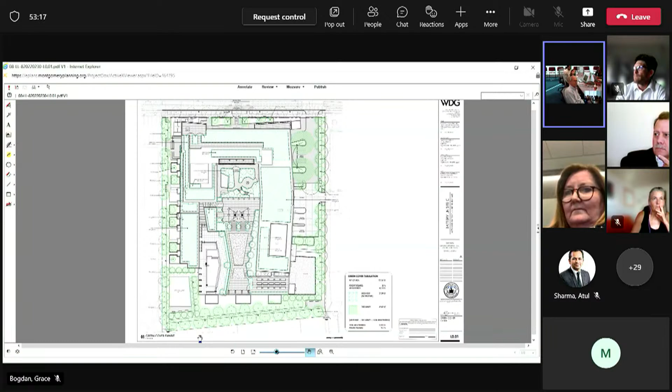If Bob, you could pull up our sketch plan, that might be a way for me to introduce this. What I want to explain is our rationale - how did we arrive at this design for these through-block connections on Site C? It really goes back to our sketch plan.

We took a comprehensive approach, 5 sites, as you well know. Our vision was to enhance this residential neighborhood through enhancing the connectivity, improving it. So what did we do? We first looked at what are the major unifying elements. It's the trolley trail through the urban park, and it's Battery Lane.

So we're going to improve the trolley trail next to our Site D and expand and improve it where the mid-block goes through to the park. And then we're going to add the cycle track from Battery, the entire length of Battery from Woodmont all the way over to Old Georgetown - a separated two-way cycle track. So what do we do?

And then we looked at what can we do to improve pedestrian connectivity. Of course, we're going to do all of the frontage improvements, just as reflected in our application for Site C and for the other sites as they are redeveloped. But we wanted to overlay that with internal pedestrian connections - that's what these two through-block connections are that we're going to talk about for Site C.

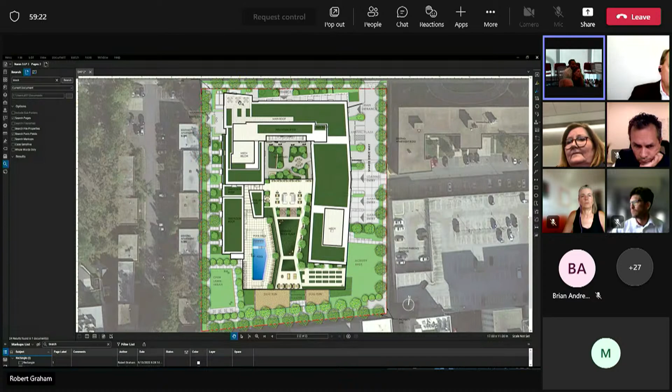Yes, it was a term we sort of ended up using, grand entry, but we were specifically looking at the western connection and how it comes off of Battery Lane. Our concern is we want to make sure that people walking on Battery Lane know that this isn't just for the walk-up entryways—this is a public space. So we were wondering if there was any way we could open this area, perhaps provide some seating walls that surround those electrical vaults, and make it more inviting to symbolize that area coming in.

We also want to know how this is going to transition. We were talking about the Bethesda Streetscape pavers, but material-wise, how is this going to help draw people in to make sure it's a continuum of public space? And then there's the discussion of how the furniture and lighting play into making that space more inviting.

So yeah, I said grand entry, but we can decide on a different term if that's the issue. That's what I was trying to figure out—what you meant by grand entry, because we were trying to be hierarchical here, but I understand if you're just trying to have it open and make people understand they can come in, that it's public. I think we can work towards that.

Just to add to that, some of the comments made previously were about looking at the design of the paving and the lighting in this area. I don't think our priority here is to turn this into a major bike connection so people can speed up and down this block on their bikes. But we do want to make sure there's an invitation to the public to use it, in a way that's much more passive and slow speed.

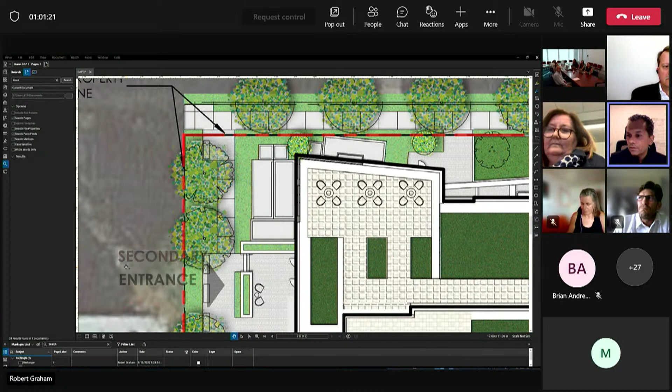If there is a cyclist that wants to use this to get to one of the other streets abutting the property, the design should be such that they are invited to use it, but when they're in it, they feel the urge to dismount and walk their cycles—because the paving is a certain type, the lighting is a certain type, and there is seating and other things happening along it that nudge you.

European examples are very good at that. I think they do a great job of delineating space, but also guiding the user of that space to behave appropriately in it. That's where our comments come from, and in fact some of the features being discussed to create this entrance are being shown in other parts of the site. For example, on the bottom right of this image, you can see where the sidewalks connect—there's a little paved space there, so it becomes more than just a pedestrian connection. We are looking for similar things along the other entrance as well.

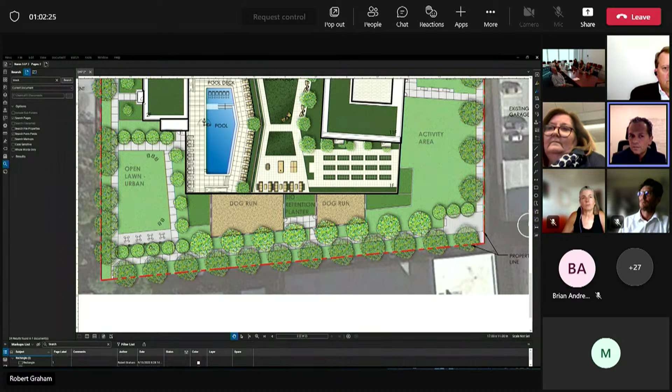And there are some opportunities there with the utility vaults and things like that that might help create some more permanent seating that screens some of that. And I think wayfinding and signage, as discussed previously, is going to be really important as well to make sure that it is used in a way that makes those intentions known.

It's a public space, but certainly not a high-speed bike connection. Yeah, we were trying to give priority, as Doug said, to pedestrians because one lot away in each direction, they have cycle tracks or cycle paths.

So, can I just follow up on two more points, Nancy? To the point that you made about the western connection and how it doesn't connect to Rugby, and how there's no opportunity or on the table right now for that site to redevelop - we understand that, but we also need to operate in the sense that at some point that site will redevelop, and how is that through-block connection going to get connected? So if your intention is not to bring it to the property line, we need to know at what point, when that site redevelops, how can that site come onto your property to finish this connection? So we need to figure out those details.

And I think that discussion was had similarly at 4901 Battery Lane, and I think there were some environmental resources that had chosen us not to bring the connections to the property line. That's not the issue here. So we just want to be able to work through that in that location.

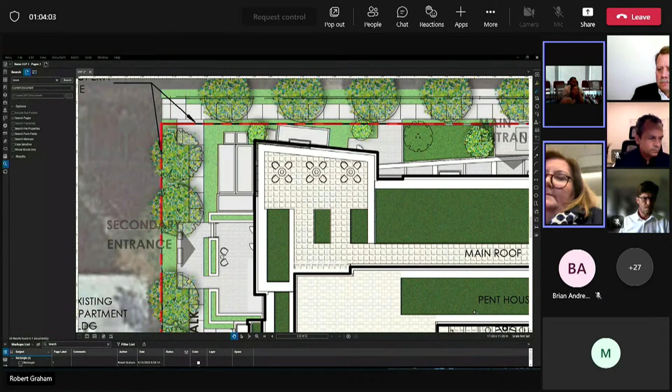And then in terms of the eastern through-block connection, I do recall, as you said, that Site B would eventually redevelop, and it would be a larger through-block connection at that point. I think when I was looking at the section in this area and then looked at Google Street View, it made me realize there is already a sidewalk on the adjacent property. So I was wondering how this is going to look in the interim, knowing that Site B is going to be your last site to come on board, and it might be closer to two decades before that even happens. So how is this space going to look in the interim, considering it's going to be a long interim? If there's any way, perhaps because you guys in this opportunistic way do own the adjacent site, could there be a way to combine the sidewalks at this point and make that space better?

Okay, we'll look at that. Thank you.

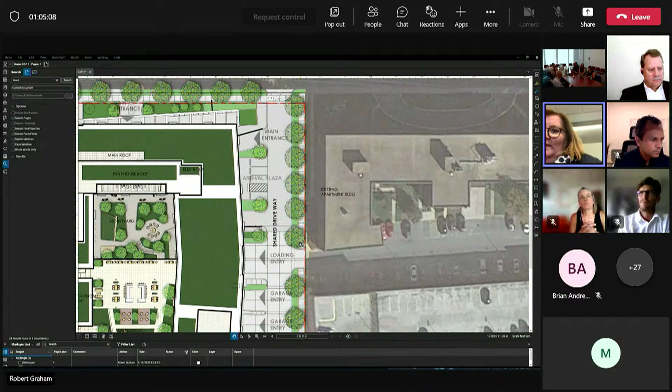Okay, and I know you commented on how 4901 resolved their future connections, which is there are nodes that give lots of flexibility for wherever the sidewalk needs to go in the future to connect to a future adjacent site. So just like Atul said, maybe there's a larger gathering space at the intersection of the western and the rear connection that gives lots of flexibility on where that sidewalk can come off in the future. So we'll look at that as well.

All right, I think we're out of time, correct? We have three minutes, I can talk. I think we have a lot of other meetings to schedule with you guys, so. Yeah.

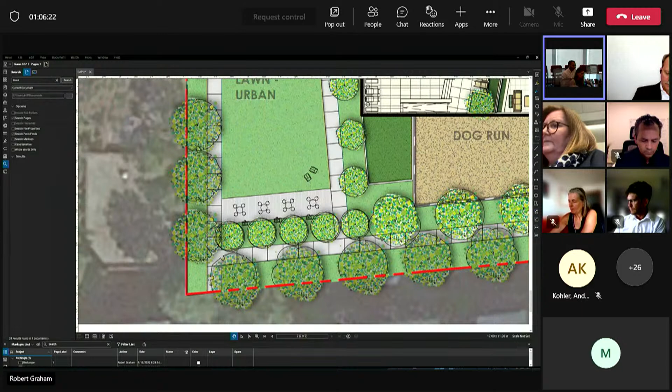So in terms of schedule, the 120-day date sort of slams right around Christmas time, and so that obviously isn't going to work. So we've backtracked it to a 12/15 planning board date, knowing that we have a lot of follow-up meetings. This is probably just going to be a timeline that we're just going to have to adjust as we move forward. But I'll go ahead and give you the back dates based on that. So your first resubmittal would be due September 28th. And I've adjusted the final to be October 17th, final submittal, with agency letters due on Halloween, 10/31, and a 12/5 posting. Okay.

Okay, and then one of the last dates in for a planning board. I'm sorry, what? So a planning board date potentially being December 15th. 15th, okay. All right, well, we'll talk internally and just see if that works, or what we need in order to respond to all these comments.

So thanks for all of your comments. We obviously didn't have a great deal of time to digest them or to drill down. So that's what the team will be working on from. So thank you so much. Thank you. All right, thank you. Thank you, bye-bye.

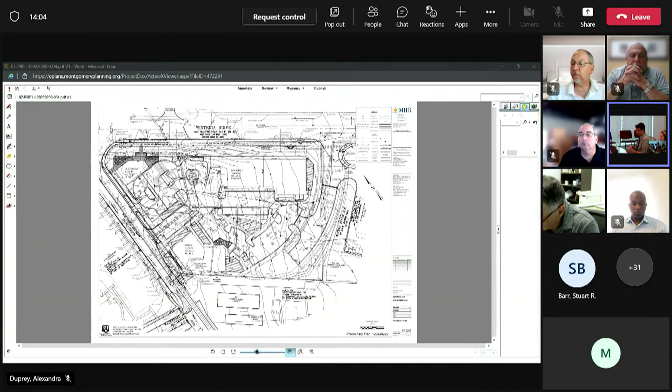As far as frontage improvements go, we've noted that the frontages don't seem to be being improved in accordance with the master plan, and that goes for Waters Road as well as Waters House Road. So I think that's about it. We'll go to the applicant now, it's your meeting.

Good morning everyone, it's Stuart Barr with Lerch, Early & Brewer. We're the zoning attorneys for this project, and we have our project team. Some representatives from Goodwill are also tuning in to hear the discussion this morning. Thank you all for the comments, appreciate it. I'm not going to introduce all of our team members, but we're all listening intently.

So I want to go through the big items you highlighted, Jonathan and Alex. First, some quick background: we signed a lease agreement with Goodwill almost 2 years ago to provide their building and access and parking to it. That's the most important component of this project. Over the last 2 years, we've been flipping this plan every which way to try to make it work. Originally Goodwill was up against Waters Road, then down closer to Waters House, and now up against Wisteria. Unless I'm missing something, I don't see any concerns with the current location of the Goodwill building, which is good because that's the most important thing.

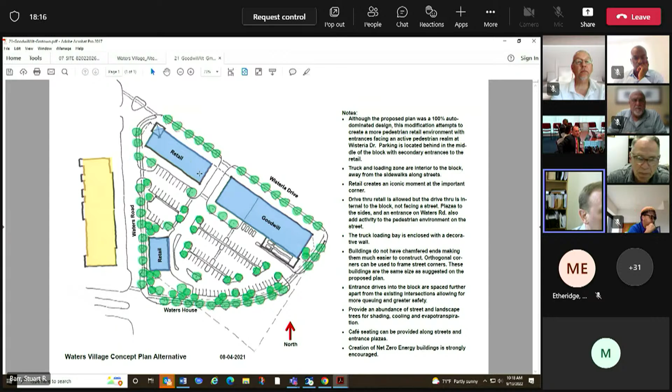We do note there appears to be a difference between showing the other building on Wisteria versus the concept you all were planning to show with the buildings closer to Waters. I think we can look at having the other retail building up against Waters as opposed to Wisteria—that seems to be the preference now—so we will investigate that. But we do want a drive-through on the site, and we'll look at relocating it.

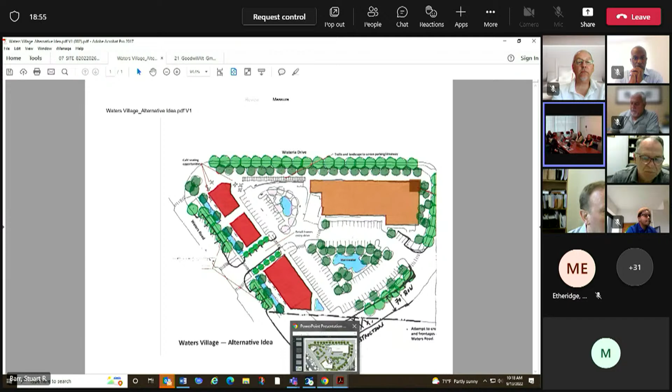Yeah, Stuart, look, we're not throwing buildings around or changing preferences, we're trying to work with what your program is. I think we're getting closer, and we were just trying to respond to your most recent evolution. So from our standpoint, we still felt Waters would have been the preference, but we're trying to work with you and your programming on site. Okay, yeah, appreciate that.

So the ball's in our court to look at flipping those. As far as some of the other things, obviously a lot of things are impacted—circulation, parking, and so forth—so we'll just have to see how that unfolds.

I guess the comment about us not providing the correct frontage improvements per the master plan—I guess we'll have to talk with our group, because we thought we proposed that correctly, but we'll investigate that.

I'd like to talk about the Waters Wisteria intersection, because I think we're not in sync on what the comments are, or the basis for the comments. So here's the current intersection—hopefully everyone can still see this—with Waters and Wisteria kind of intersecting at somewhat of an angle.

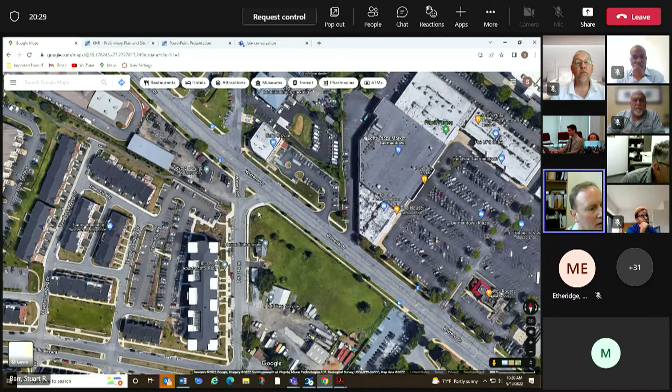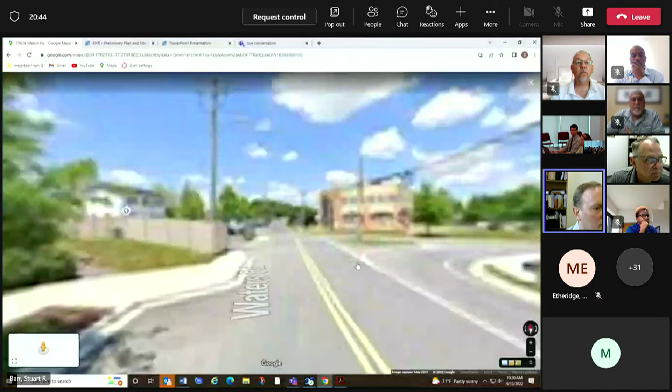The right turn that allows you to take that right from Waters onto Wisteria—our client provided the right of way for that turn movement within the past several years, and that improvement was made. So as you're traveling northbound on Waters, you have a stop sign at both turn movements, and the way the alignment works now, you can go right across Wisteria to travel to Waters Road on the other side. Conversely, if you're coming from the other direction on Waters, coming from this side of Wisteria, you can easily get across Wisteria given the alignment as it currently exists.

So we think it works. If we need to restripe this to make it more clear for pedestrians, we can certainly update those crosswalks. But I'm just not understanding the comment about—let me pull it up—eliminating the right turn lane and the island. So if we need to have a follow-up meeting with DOT about that, we can.

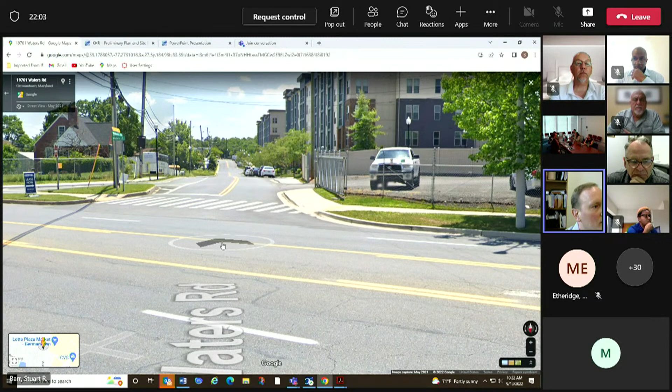Want to talk about the terminus of Waters House. We can certainly look at a hammerhead arrangement here.

This is just my personal thought on it—I was hoping we could have some kind of gate or bollards located so that no one needed to go down and make a turn around. But we can certainly look at a hammerhead configuration if that's the strong preference. I just think it makes more sense to have a temporary gate or bollards, but we can talk about that further.

I do want to reiterate how important it is for us to get the Goodwill building approved in December at our hearing date. Under the timeframes, we have an agreement in place—we've spent the last couple of years modifying the plan and really need to move that forward to meet the deadlines. So if that means we need to phase things, so be it. But we really have to get this Goodwill building approved and underway as quickly as possible.

I'm going to flip through some of the other comments. Brian, did you want to ask anything specific? Brian Donnelly from Macris, Hendricks is our civil engineer.

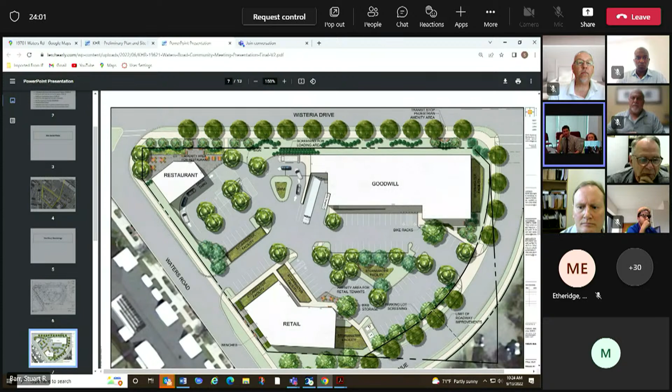That cross section was only approved that way because they were working with limited frontage, limited dedication at the time. Since you're going to be dedicating with this application, that provides the full right-of-way width to improve it to meet what was envisioned by the master plan.

But I guess because of the right turn lane, we really can't fit any parallel spaces in to make parking on both sides, unless you're okay with eliminating that right turn lane. Well, and I think we made that comment as well. Eliminating that right turn lane would fit with the cross section. It would also allow for adding the on-street parking, maybe not all the way along the entire frontage, but at least in some locations.

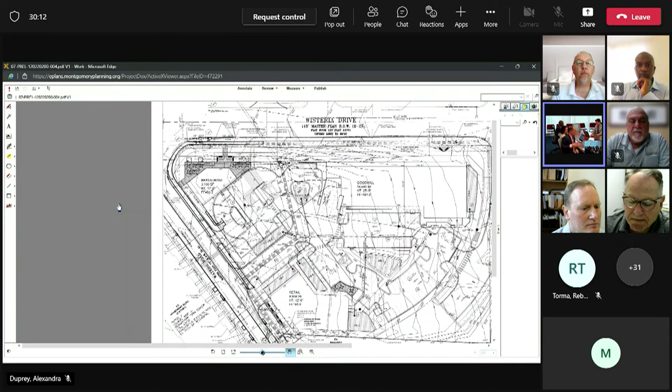Yeah, now look, I mean, we kind of jumped right into issues, but taking a step back with the residential community to the west of here, the train station and the formal connection of Waters Road to that station, seeing what you're trying to do on this site, grand aspirations someday across Wisteria Drive, that shopping center gets redeveloped as well. We're really seeing some of the framework of a town center come together, a main street, et cetera, and really want to put this project in the best position to succeed here moving forward, that we get all these pieces in place. We're not looking at this in isolation, so we really are trying to make sure that we get it right with this very important step. So appreciate that you're here moving forward and trying to figure these things out together.

Well, when do we expect comments on the traffic study? This is Billy Whalen, we're still reviewing the TIS. I'm sorry, was the question, when are we getting comments? I didn't, yeah, I mean, the comments were due this last week. So we just need to know how that is going to impact our infrastructure.

This is Rebecca Torma from DOT. Did we approve a scope form? Did DOT and planning hand you a signed scoping form? Scoping, do we approve scoping? I don't think so. Chris, are you on? We scoped this with Chris Van Alstyne, and then DOT had some comments, and as SHA did as well. Okay.

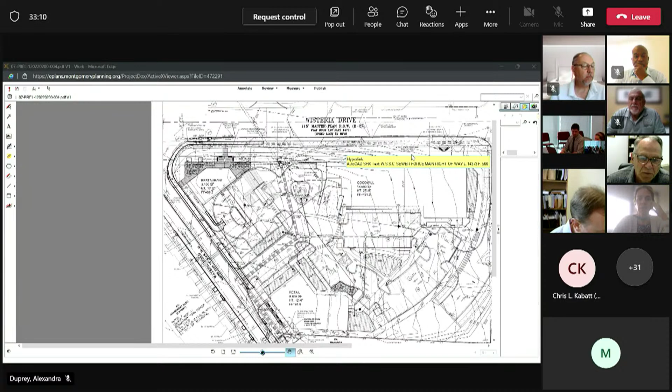Yeah, we'll do that, Rebecca. Okay, well, part of the reason why I ask and I'm a little anxious to get those comments is that we're on a pretty strict schedule with trying to deliver some of these buildings. So that's really why we need to get this thing as complete as we can. Right, but you shouldn't proceed without a signed scoping form.

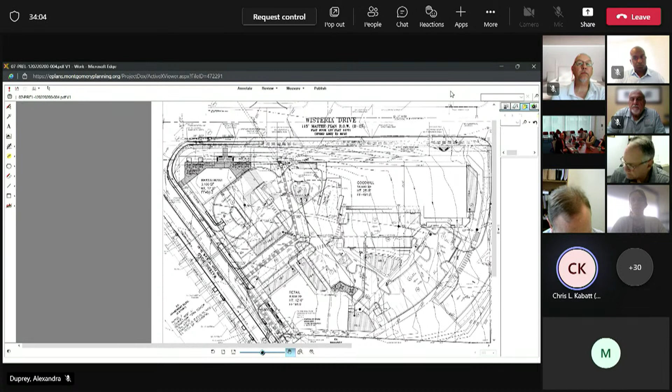Understood, so who has the scoping form at the moment? Is it us, or is it DOT, or the applicant? I believe we got dropped, it got dropped, and then I know there was comments sent. So I'll take a look through my emails and see what I can find, and we'll coordinate with Brett Brown. We'll do the same, because I think the last thing was confirming the study intersections, and that's what I was saying about the correspondence, Rebecca. So we'll get together and share those with you if they're not in the appendix. And then we'll just come to the agreement. Yeah, like I said, I just can't remember exactly what we did or what we said.

And Chris and Rebecca, if there's anything you need from us while Chris Van Alstyne is out, please don't hesitate to reach out either to myself or Brett. We'll try to fill in as much as possible, and we definitely want to keep things moving on our end. Okay, thank you. Yep, sure.

Well, you guys had some issues with the drive-through in its current location. Do you have any issues with the drive-through on the site in the back portion of the property? Or is it strictly the drive-through that you're opposed to?

Are you referring to locating the drive-through in that area? Because the sketch you provided didn't show any drive-through, and I just want to make sure. In general, we prefer not to have the drive-through, but if we're going to pull the deal-breaker card, then yes, that would be the location it would have to be.

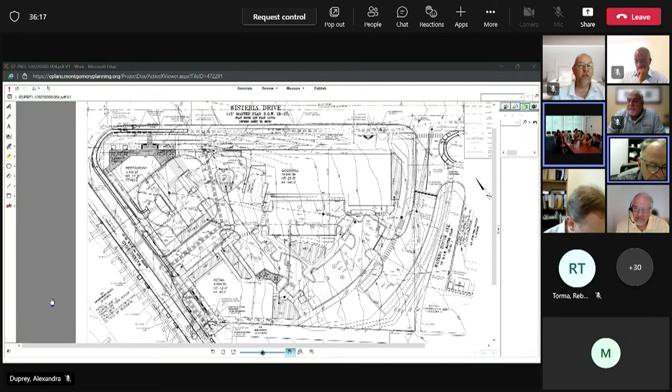I don't know if our urban designer is on the call, but I'll jump in here and then turn it over if he's here. We have serious concerns with the location you're proposing for the drive-through. That's the least ideal place, not just because of visibility, but also pedestrian and vehicular conflicts within the site and the current layout of the Goodwill store.

So if you were to keep a drive-through on this proposal, it needs to move. We think the lower corner is probably the best location, out of the way, and will still enable safe, adequate, and efficient vehicular circulation and pedestrian and bicycle flow through the site. So that's our thought.

I also want to add that our concept and thinking was revised from the version you saw a couple months ago with the concept plan application. There are several things here we want to highlight with building orientation towards Waters Road rather than Wisteria.

I see that Roberto and Paul are on the call. I'm going to turn it over to them to elaborate a little bit more on the design comments, and I'm still here and available for questions if you have any.

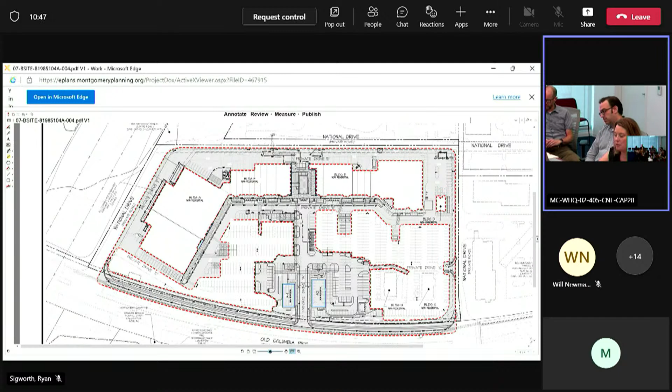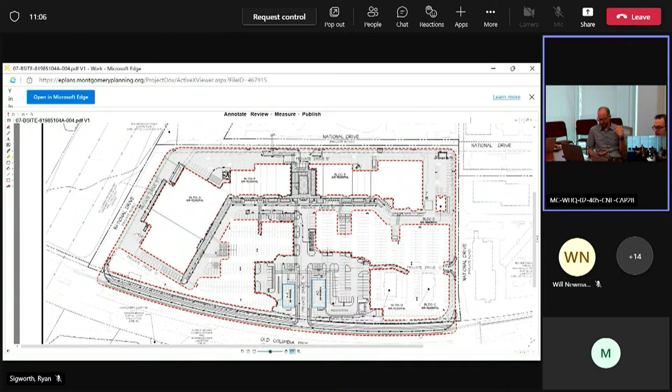Thanks, Christina. I don't think there's a lot of huge issues. There's some questions and concerns from the design team and the master plan team about the rear face of the existing buildings, since we kind of expect the property in the back to redevelop and what that's going to look like.

I know that's maybe not technically part of this site plan, but it's still a concern. Had a couple of different pathways and some questions. I think the biggest issue is just how that centralized open space, where you're going to knock out part of the building, is going to be designed. And I think DOT has some requests as well.

But that's about it. There's not a lot, really. You looked at the comments, there wasn't a great deal. And you read them pretty much in order of what we had, because we had a meeting yesterday and identified what we'd talk about.

And I had a question, what you were doing with that covered breezeway between building D and the main building?

Because there's a covered bank drive-through or something there now, are you taking that out? I saw there's outdoor seating there, but are you going to take that out, or what? No, maybe we need to clarify. The intent was to keep that covered area for now. Yeah, I was going to say, I think you're going to make it outdoor seating. You should just keep that and reface it and make it look better. So in the file, we just need to create the red line, show it as dashed lines or something, and call it out to remain.

Yeah, it was just tough to tell what your plan was there.

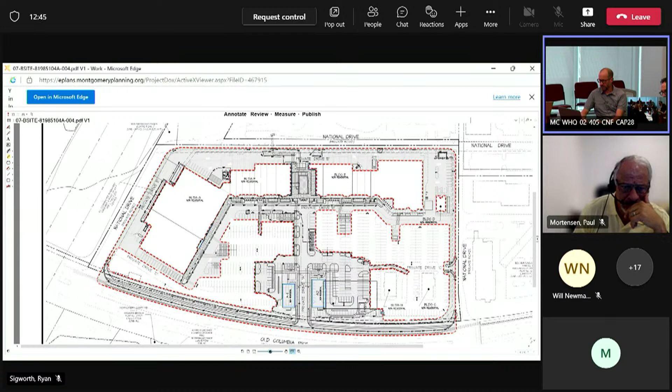Then I had this part of the site, it's very confusing. I think I drew it in E-plans. What I'd suggest is you have this pedestrian route that just kind of ends right here, maybe it's just an oversight in the drawing. Yeah, there's no way to get in, and you'd go right past the dumpsters. Well, actually, that's what that's intended for. That's sort of a back service alley, it's only 3 foot wide. It's just so that if they come out of the back, we have a screen wall at the back door and some of the utilities.

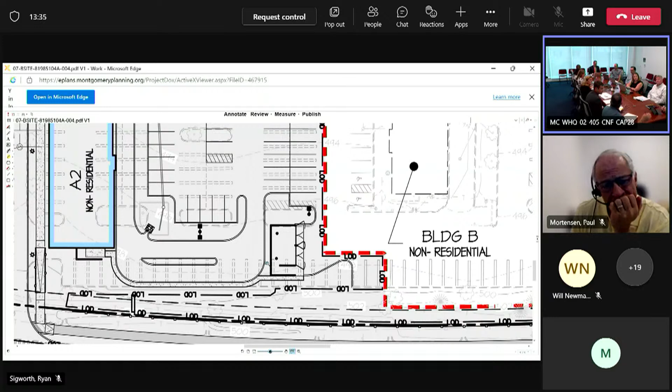We just wanted a safe way for someone to walk trash over versus walking in the drive aisle. So that's a trash enclosure, which we've made a little bigger because these other older out parcels have small trash enclosures, and they're keeping one of them out, so that way they can move it in there. I see, it really gets shared. My comments were intended to link them. We'll study linking to the north of this, whether we can actually get a link over to the Burger King or not, from a grading standpoint.

Yeah, but I think that's all this intent was for, trash. I see, that's why it's so narrow. It wasn't dimensioned, at least on this sheet. I didn't notice, but now that you mentioned it, it does look narrower. Yeah, I think we typically do 3 foot wide, so someone can either have a little rolling trash bin or walk through there. Okay, which is why there's no curb ramp, because you're just going into this space.

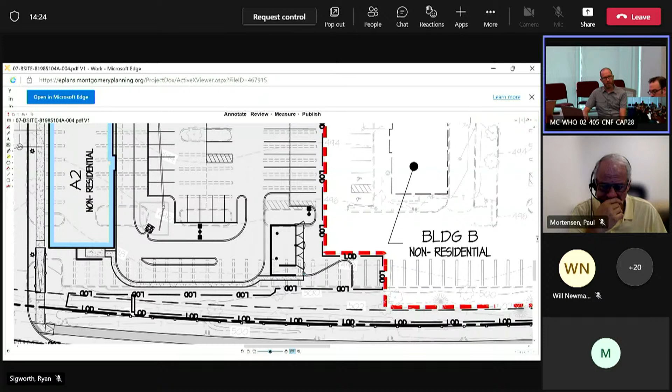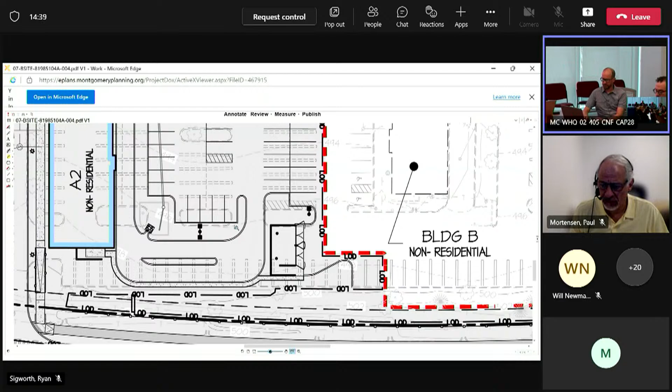Yeah, and that's what we call a chicane, so we find people don't leave the doors open. There's just an opening that someone can walk through. The doors aren't open until the trash person comes, then they open them up. Okay, so that's where that's leading. Your narrative makes more sense than the 2-dimensional plan did. Yeah, we'll clarify, we'll add some notes and clarify, here's what we're thinking.

There were some comments about just showing vehicles there to make sure you meet your queuing space. I don't think that's going to be a problem.

Jeff, you want to talk about the open space? I think that's probably the biggest issue that needs to be discussed. Yeah, do you want us to talk really quickly about the back of the building? Yeah, I think Ryan can speak to that.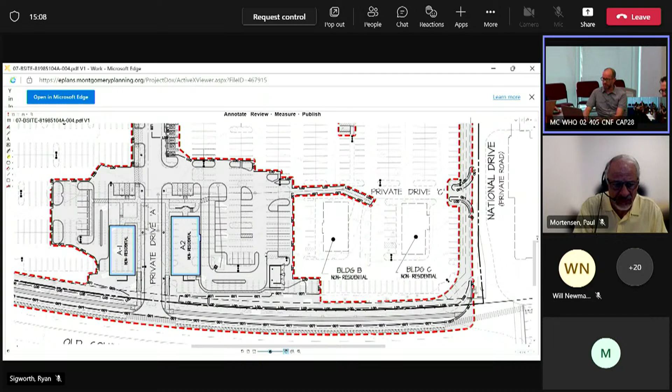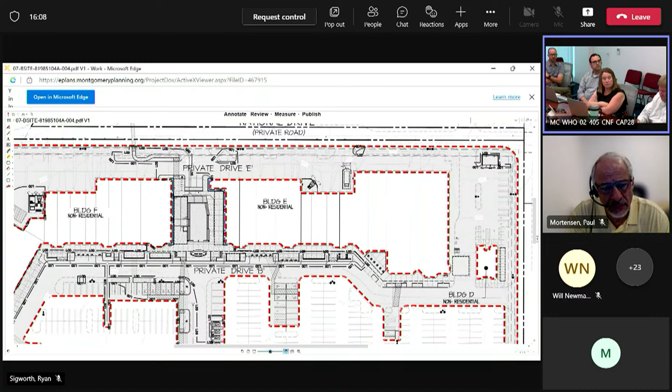We're trying to do something similar to what we did at the back of Cabin John. It is going to remain the back because that's where the back entrances are, but I think the intent is to carry treatment around, especially where we have this plaza area and some of the corners. We're also looking at doing some murals, adding some canopies to try to make it feel a little better, but everyone needs to realize for this phase, at least, it's going to be the back. That's where the service drive is. We're enclosing any of the trash that's back there, some of it right now is not enclosed, so we're going to try to dress it up as much as we can, and we'd be more than willing to share.

As you said, that's not really part of the application, but we can share what our vision is. Yeah, because you're going to do kind of what you did at Cabin John, where you reface the buildings before the site plan, or... Right, yeah, yeah. So we'll share that information with you.

I figured as much, you guys have experience with Cabin John Village. However, this is Paul Mortensen. The Cabin John development was predicated on breaking through the very long mall with a new street in order to connect one part of future development to the existing front of the mall. And I think that same idea needs to be something that, if not created right now, can be realized in the future, or that it isn't precluded by not allowing something to go through that possibly links private drive B to private drive E. Because even if it's going to be a back for a while, and even if this mall is going to basically continue to function with a sprucing up the way it has in the past, with the transit center and everything else that's coming to the east, I think there needs to be some means of providing that connection into the future, and I think that's going to be very important.

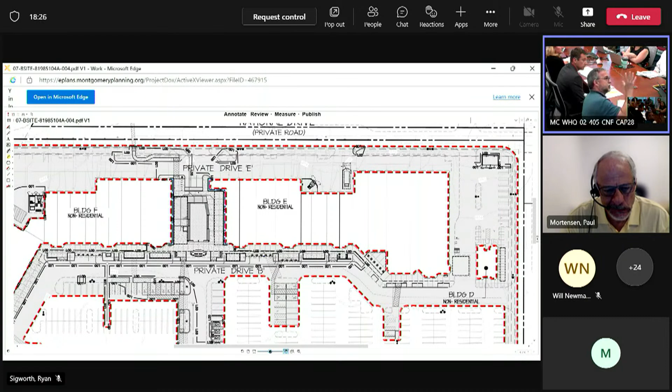Great, sure. And if you want to zoom out a little, because I think we envision whatever development happens over there, we're hoping by doing this we're forcing the direction of that. But what happened is when they created these new bus drop-offs there, they're right across from this. So you don't want really—and that's why our sidewalk connection is way off to the side—because those are two bus bays, so we certainly don't want people crossing in between buses or to have traffic pushing out into this bus drop-off area.

So I think our intent is we can create a place now. Hopefully this all redevelops and becomes a grand center and can be lined up with the street that eventually can pull through. I know someone talked about Bethesda Row, which really that section—because our office actually used to be there and we used to eat there all the time—but that really is just a pedestrian area.

But I think, again, we view this as we want to create a space now that's very useful and the community can use, but it allows us to also eventually, when something happens, to continue that through, potentially either by redefining that space or punching the road through, depending on what that development is. It's just hard to know until we know exactly what's going to happen over there.

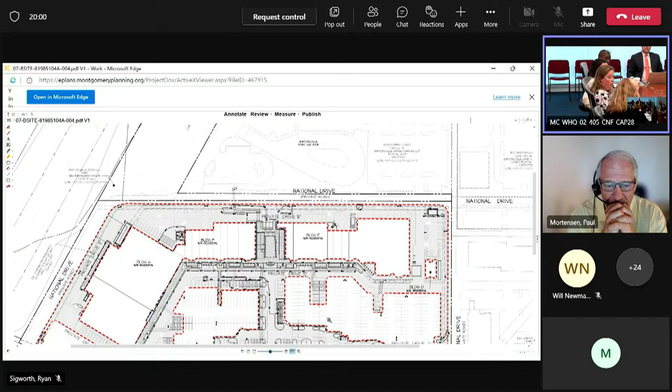Well, and I think more fundamentally, it lines up, the right of way is there. Right, so we were a little confused by the emphasis on those comments, because that's where the space is and it could be converted in the future. So yeah, we wanted to get it out there now, so it's not a surprise later.

Yes, we're very much going to be focused on that adjacent development as well, and be steering towards the fact that this will all line up and make a complete thought. And we know that you're taking the first step like you're describing. So it's really for the grand future that we don't want to surprise you later.

Sure, should this happen sooner rather than later and we're having this conversation again, you say, wait, you never said you wanted a street here. So, totally understand that Bethesda Row is pedestrian only, but the idea is that this could be a road connection, setting it up now so that it could be that.

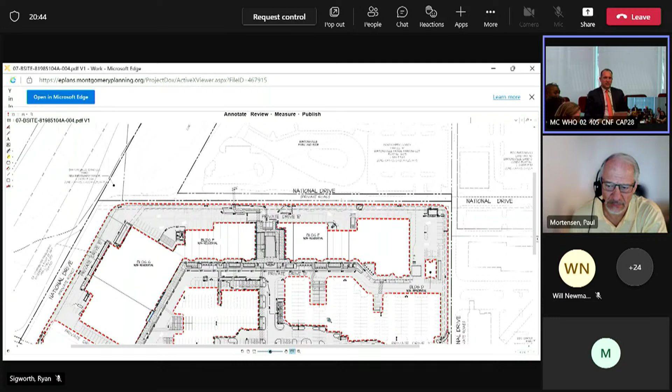And absolutely in the interim, like you're describing, design the space so it's sort of public space, for movies and concerts and whatever you like to do. That's fine. Exactly, and so we have provided a pedestrian connection for those people that do want to do it. Again, it's somewhat awkward because it's shifted, but because of the way the bus bays are, we really can't go straight.

So I think we've done as best we can, given what's on that. And we don't control that area over there. But one of the questions we'd have at this stage is, do you have the width necessary for a street to go through in the future? Yes, that's the type of thing we'd be looking at at this stage.

Sure, we're not going to ask you to build the road, but certain key aspects like the dimension, is it there? I don't know if you want to go as far as the subgrade. Do you have the subgrade you need later? But those are the type of things at this stage you can think ahead about, so we can be as proactive as possible and not have to tear down the building in the future, or tear down things we don't need to.

That's all. Yeah, the width is there, Sandra. As far as the subgrade, my experience with these is they'll do what they need to do at the time they need to do it. So if we're going to put a road in, we'll deal with that subgrade. That's fine.

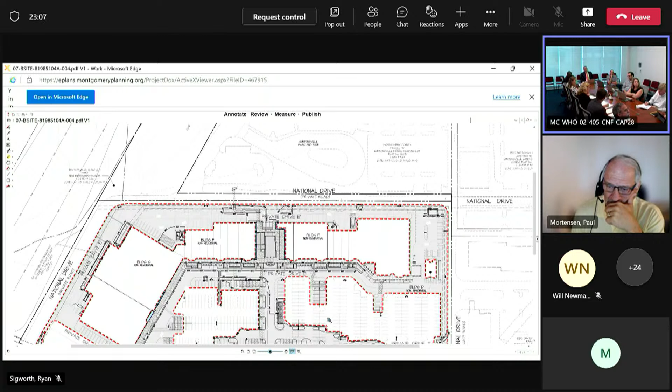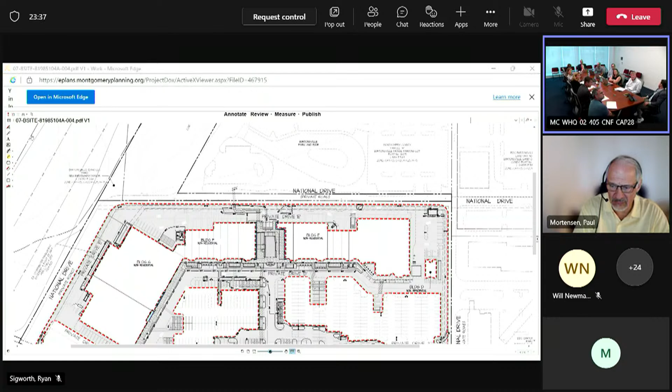It'd be even nicer to have an entry to that space on the back corner, to start to animate and activate the back portion of the plaza area. So you get users from the park and ride, the BRT there, who can slip right in, grab their coffee, or park quickly and pull out. Our thoughts on the plaza design are to buffer that, with a low wall in front, a landscape area, a tree proposed there, so you're not getting headlights shining through at night if people are pulling in and out. But it unlocks a bit of merchandising potential to have those there.

But that's really the back of the building. So the only people that are going to park there are the workers or somebody. Well, we were just told they don't want it to be the back — they want it to be activated. So their point is if you can put an active user in there.

It would just be like 15-minute parking, so the employees shouldn't park there. It should be for someone leaving the park and ride — they jump in their car, come over, park, pick something up and go, was the thought. The tenants are... certainly, I think if the county feels strongly about it, we can reconsider it, but that was what we had envisioned.

Is there a way to do parallel parking along our property line? Yeah, unfortunately there's just not enough. There is, I think, some parallel already. There's not — I mean, we looked at whether we could get more, but the width just isn't really that wide back there.

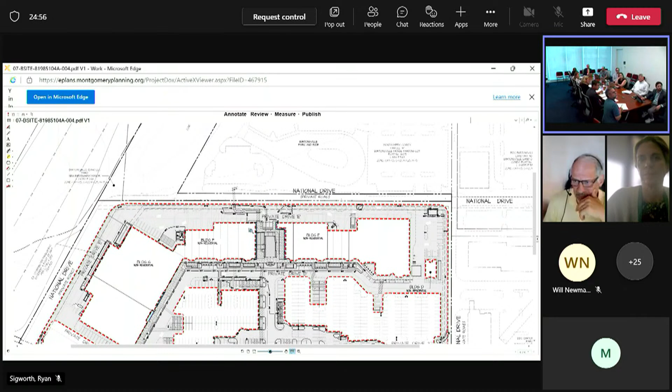There may be — I'm just eyeballing the car you have on there, and it still looks like it may take some reconfiguration we're not showing right now, but there is still that curb line, Patrick. There's parallel — we got rid of parallel to do that sidewalk, but you can see behind it where there is some parallel, right here. Yeah, those are parallel spots. So there are some parallels. Those are staying. But we had to get rid of some to get that sidewalk connection through there.

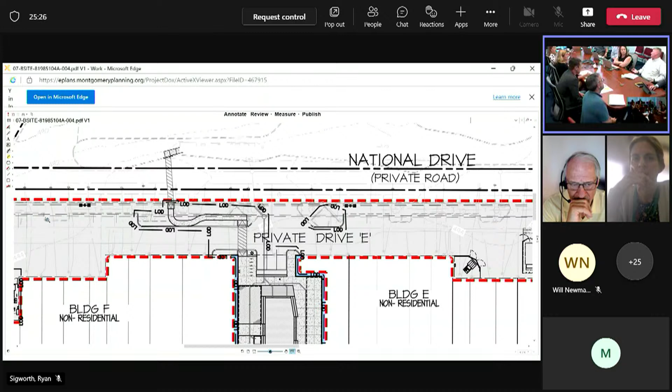And then the idea of employees parking there — I think the retailers are gonna control that, right? They're gonna direct their employees not to park there, because the purpose is to get customers in and out of there.

Yeah, we usually create a program, depending on how tight the parking is. We'll sometimes put a blue dot in the parking spots where employees can park and get the license plate number so we can control where employees park. So we're very involved in that.

We can talk about it internally and get back to you.

Yeah, that's fine. Personally, I think it's strange. Yeah, I was going to say, it was strangely, of all the things, I think that might end up being one of the things we really feel strongly about. We like it, but we understand there's a compromise too.

Appreciate that. I know that MCDOT had a couple of things to discuss with you. If Rebecca or Deepak want to discuss your comments a little bit.

Yeah, I don't think we've seen those yet. Yeah, I haven't seen that. Oh, Deepak, are you on the call? Yeah, this is not my project. I see Brenda on the call too. Is it Brenda's project? Oh wait, it's a site plan. It's nobody's project. It should be Sam's comments.

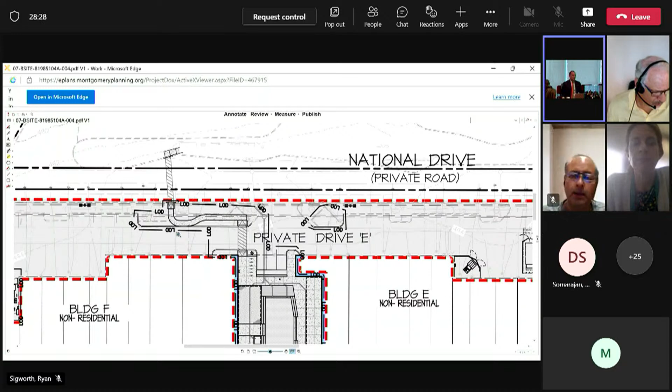Sam, where are you thinking that goes? I mean, I think we, the planning department, would really like to understand where that's going. We don't have to resolve it all right now, but we want to hear where you envision that going on this property.

We had a meeting with Transit last week to discuss this very issue, and the reality of it is we are willing to work with the applicant to provide this facility. The preference will be to provide it on the subject site plan, but if there's a means to work it through the transit facility to the north, that's something they're willing to discuss with you. So the answer to your question, Patrick, at this point is up for discussion.

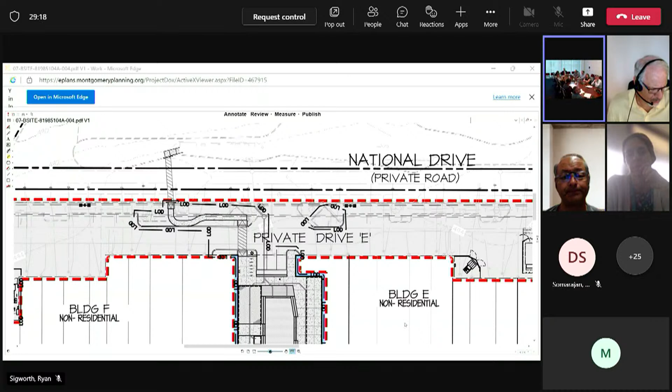Yeah, and I guess that was my next question. I think you just said it. I have to imagine as part of the redevelopment of the adjoining property, the housing project with the transit center, it would be logical to have the bus drivers right there using a bathroom facility. That's also an option we're exploring.

What are you talking about? Redevelopment of the park and ride lot? Right. As far as I understand, planning went and asked DOT or DGS if they talked about redevelopment. I'm not aware of any actual developer redeveloping the park and ride lot.

And when we talked to Transit, they said they needed a park and ride lot. So as far as I understand, it was just planning staff going and talking about redeveloping the site. It was not any specific developer. Can you guys correct Sam or me if I'm wrong? I thought I heard there was.

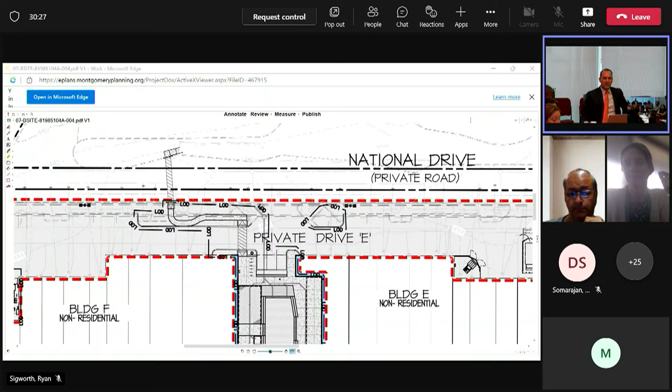There was a big press release with the county executive talking about redevelopment of the adjoining property, and you're making a face. Am I misunderstanding? I'm not aware of the timing, Edens was looking at doing that, but that was many years ago. Oh, no, I'm not saying you.

Oh, okay, there was a recent RFP. More recently, there's an RFP, and the county executive was on site talking about the plans for the adjoining property. I thought this was very public and nothing secret. It's not Edens leading the charge.

I think the county is developing the adjoining property, or at least putting out an RFP to redevelop that property with the transit center, and in addition, look at what Edens is doing on their site, which will tie in to all of this. So planning wasn't just out there doing things. I think your county executive, our county executive, was just having a press release about all this a month or two ago.

One second, I just put something in the chat with a link to that RFP that was issued in 2021, October 2021.

I can probably share this if you like. Yeah, we can revisit that. I guess my apologies if my assumptions are incorrect. I thought there were some plans to move forward with the adjoining property, and that would also be an option for the location of the bathroom facility. Understood, so if not on this site, we can figure something else.

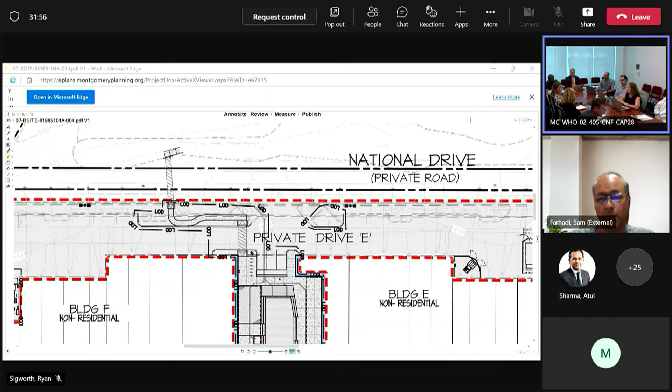Just to piggyback on what Patrick said, I think at this point in time, Transit is ready to discuss it with you, and they're willing to work with you to get this thing materialized. So this is our request for the applicant to do that.

I'm gonna make sure you have enough time because we're going over. That was a little bit of a detour. Sorry about that. No, that's okay, we need to know about that too.

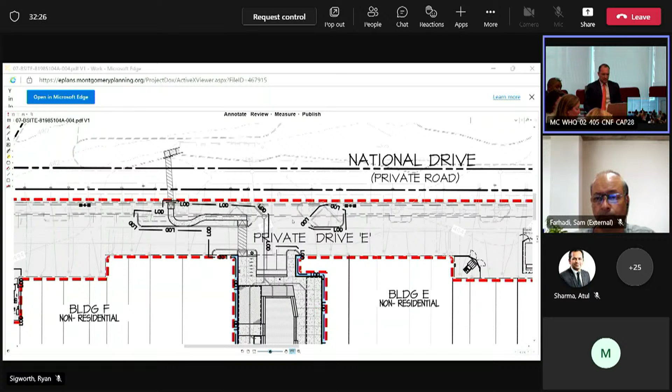Just quickly, we did have questions on the traffic. Both of these things kind of go together, the traffic comments and really the lack of comments. It said incomplete, and you may or may not know we were stuck in intake forever, and then when we finally got taken in, we were put off another month. So timing is important. I don't know if you've gotten any comments from the community, because this is one of those situations where if you don't get comments within a certain period...

Our hope is that we can get the rest of the comments, do one resubmittal, and I've gotten no emails, no phone calls, nothing. We don't need to go to the board, right? So if we don't get anything, we don't need to go to the board, right?

How was that determined? Because we don't remember, this was under the old zoning ordinance. Was this submitted as a director level amendment? Is that what you're saying? Because I don't recall that.

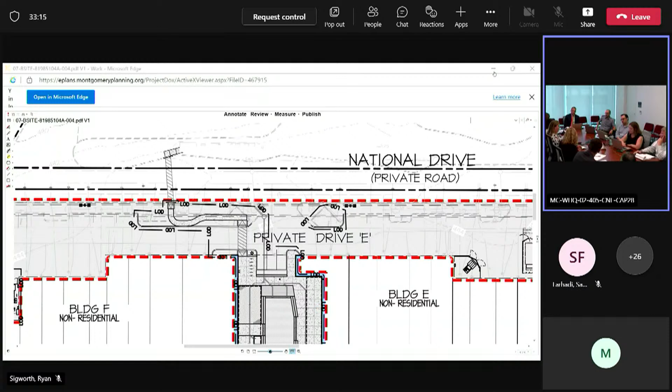Our understanding was that there was the option that if there was opposition received within the 15 days, we would have to go to the board, but if there wasn't, it would be at director's level.

I'm checking the checklist, I have to double check because at one point we had consent item agendas, now we no longer have consent items. Was this maybe the checklist? I think it was, Drew, I'll look at it, it's been a while.

I'll look at it. And on our notice, we recheck that before we sent the notice, because the notice says 15 days or there won't be a public hearing. The checklist is marked as a major amendment.

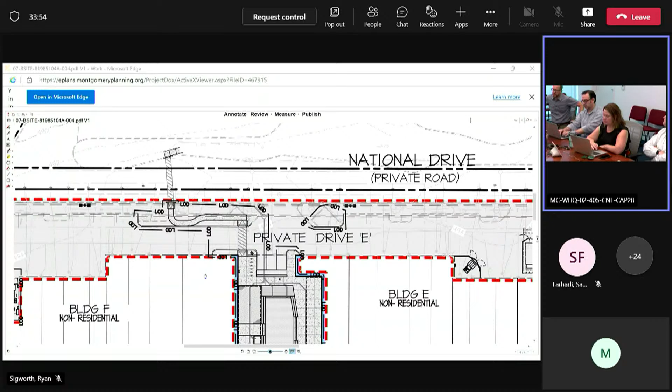You want to share the checklist on the screen?

I've got to go back through the history because it's been so long now. Since we are proposing two pad sites, I find it hard to believe that we checked this as a director amendment, we typically don't do that. My question was, I guess my doubt was if we had discussed this as a consent item, which we might have since this was so long ago, but we no longer have consent items.

So it would be a public hearing that you'd have to present to the board. And you don't bring anything with consent. No, you can thank Al Carr for the most inefficient thing. The former consent items, we still have a public hearing. If there's no community opposition, the board may choose to not have a presentation. So all in all, it's like 2 minutes. Right, but it's up to the board's discretion.

It's still advertised as a public hearing. It's still listed as a public hearing. It might be very abbreviated, like 5 minutes. Okay.

They all become extension requests or public hearings now, unless someone signs up. We felt it was similar, everything that occurred within the public hearing was a public hearing, but there was a lot of debate as to whether or not they were. So we've just, out of abundance of transparency, made it all a public hearing. We will literally hold it 30 seconds if that's all it takes, and we'll march through the items.

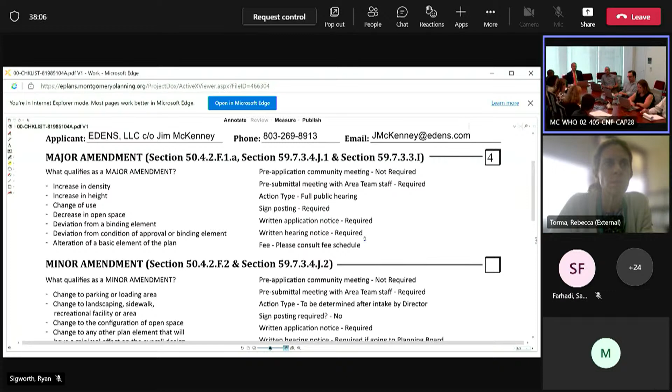And this was a while ago. So we just don't want to get tripped up on that because it really shouldn't be much of an issue. I think the study was required because you're adding 2 fast food drive-throughs. And I can see that. Yeah, it's not an increase in square footage, but it's an increase in use and thus a change in trip generation. Yes, it is.

So what's the name of the project? Just so I can try and see if I got it. Burtonsville Shopping. I'll pull that up for now, just to see. Burtonsville Park? I think it's shopping center. Yeah, it's called Burtonsville Shopping. When did you send it in? It should be in DRC, right, or DAIC? Our understanding is we were formally accepted at the beginning of August, but we heard that it was not circulated until last week.

We had initiated a review with the state earlier, fearing this a little bit, but now seeing that the comments still aren't here. If it was distributed, generally DOT takes 30 days to review, and the state takes 45 days for their first review and every subsequent review, I think.

Rebecca, I understand it's been more than 30 days for staff, and the state has had it certainly more than 45 days in terms of the other outreach we've done, independent of this process, because we didn't want to run into this issue. So the document is in supporting documents in E-plans.

I will say, sorry to interrupt, I have not seen the traffic study, I have not received it by email. But I don't think you necessarily should have, Rebecca. It's a site plan, and I don't know if it would have been submitted to you. I think it would have been reviewed internally here at Park and Planning by transportation staff and by the state. I don't know that it was necessarily a requirement for DOT to review it. I may be wrong, but I thought DOT did all that at prelim plan, and we're beyond that.

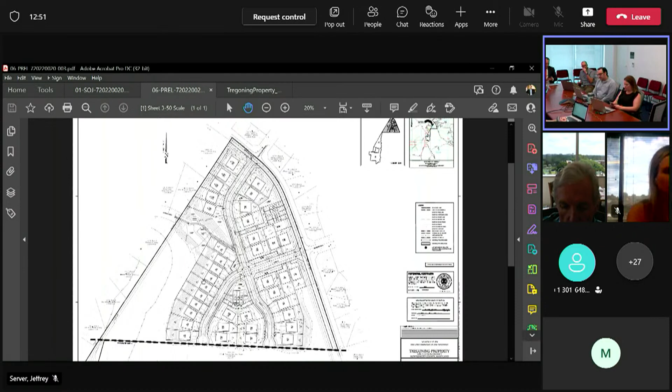So Jeff, go right ahead and take it away. Great, thank you Christina, good morning everyone. This is Jeff Server. The issues with this application are pretty much the ones outlined, being that this is a pre-preliminary plan. Really, the discussion focuses on the three issues identified in the statement of justification - the connection for Hoffman Drive at this location here.

In this pre-preliminary plan, it's being shown as a path connection. We're still really insisting on that being a formalized street connection, which we can discuss in more detail. The second point being the connection to the regional park that is adjacent to the subject property, and so we'll certainly discuss that in more detail.

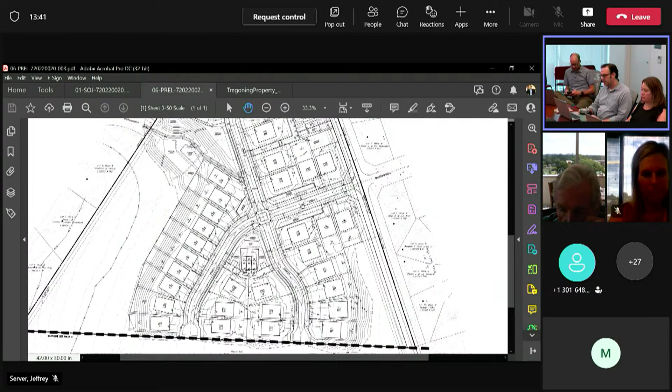And then lastly, it's noted the location of the MPDUs, but there's a greater discussion to be had, which is the arrangement and configuration of some of the other units as well. So with that, I'm happy to turn it back for any questions or comments or feedback from the comments that were provided.

Okay. Good morning, everybody. I'm Kate Cubitt. I'm with the applicant. And we do have a couple questions, unless somebody else has any sort of clarification they'd like to provide. No, go right ahead, Kate.

Okay, great. Thank you. First question is for Doug on his comment with respect to the forest conservation. Yes, Kate, this is Doug. Thanks, Doug. The comment is that we're required to provide 7.52 acres of on-site reforestation, afforestation, and conservation.

The question I have is, do we think we can meet this between the two parcels? We're going to look into that. The question we do have is, are there any examples of exemptions that are ever allowed in this type of situation? You mean forest conservation exemptions? Or any sort—I know there's a variance process, but is there a variance that can be granted? And if so, is there an example you can provide of such a variance?

Well, Kate, what type of variance are you requesting, and from which section of the law are you asking for a variance? Well, with previous projects—maybe Bob can get into specifics in terms of the ordinance, I'm not exactly sure at this point—but on previous projects, for example, we've had variances to do things like purchase off-site forest and off-site credits.

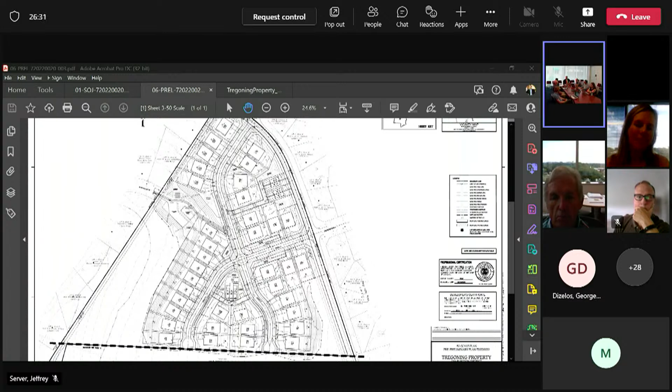All right, we appreciate the comment, Jamie. I think we'll talk internally. On the surface it sounds like the appropriate process has been followed, and I understand what it says in the master plan, but it sounds like the actions after that in the water and sewer category changes, in effect, would amend - without fully reopening and amending the master plan - but I think the intent was clearly to provide a path forward, and in effect it amends that one line in the master plan. But we'll talk internally and confirm that, Kate.

Sounds good. Thanks, Patrick. Thank you, Jamie. We'll look into that too and share any information. So I guess we'll follow up post-meeting here with Jeff to set up any follow-up discussions.

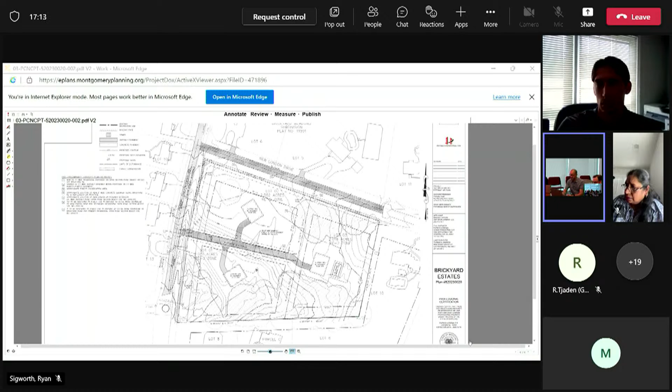I do want to note that the subdivision regulations require a 25-foot theoretical truncation at the corner of New London and Brickyard, and you only have 15, which I'll zoom in on. This dimension doesn't meet what the code requires, although there is a mechanism. I've quoted the whole section in the markups to request a modification, but as you can see, the truncation here is much bigger than the one you're providing. That said, I think that would get you below the minimum lot size, so that's a problem if you don't get that modification.

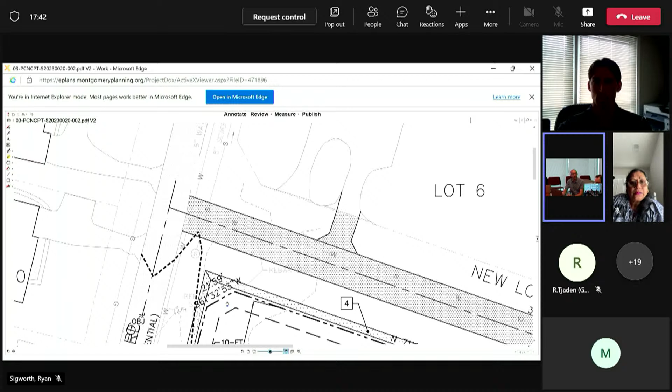I also see comments regarding, since New London would be the lower classification street, putting the shared driveway out to New London rather than Brickyard. I don't have a problem with that. I think that makes sense.

You'll probably see comments in there regarding the in-ground pool. I realize these plans are just illustrative, but the way these lots are oriented, lot 3 specifically, the front is on New London, so that pool would be in a side yard, and the zoning ordinance wouldn't allow that. It would allow a pool, you'd just have to reorient it to the rear yard in this particular area, just to be advised of that.

Doug, did you want to discuss, I think there's an old NRI and a new NRI needs to be done, if memory serves. Correct, there was an old NRI from 2017 that has expired. So if you move forward with this, we're going to need a new NRI FSD approved before any other development applications. And Doug, correct me, but because these lots are right at 2 acres, the board does not typically want to accept easements on lots that small, so we won't be requiring or requesting any forest conservation easements on the property, just due to the lot size. That is correct.

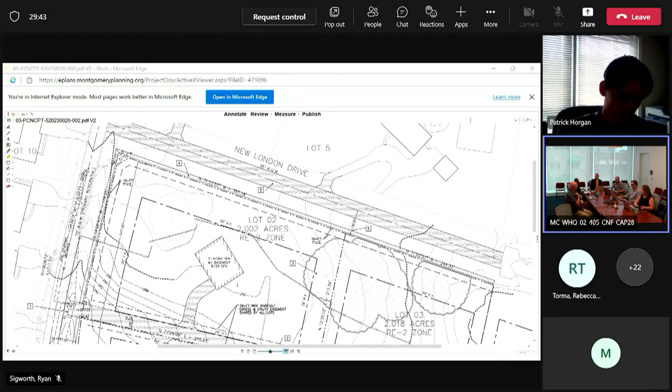Rebecca, you want to cover that? Yeah, it's just a standard comment that we have. Generally, you should be okay without it. It's just a standard comment. If you come in later at a date, you're at a concept. If complete streets is adopted, which is our new context-sensitive road design standards, then you would have to comply with that.

Gotcha. And does that impact right of way, or just how the section's designed, or is there a way to view what that impact would be? I think it's on the planning website, complete streets. If you Google it, there should be a document on there.

All right, I think we have like 5 more minutes. So my other major concern about this is basically stormwater outfall and capacity of the existing system. Hopefully someone is on who can help me with this. There is a 24-inch RCP pipe in the bottom left of the plan in lot 1. We did a preliminary analysis of that based on the 10-year 24-hour storm and an estimate of what impervious area is going to be. It is right at flowing full, so it could, depending on the final conditions, not have capacity. So there's a concern around that as to would we be required to upgrade the system to a 27-inch pipe? How far down would we have to upgrade it?

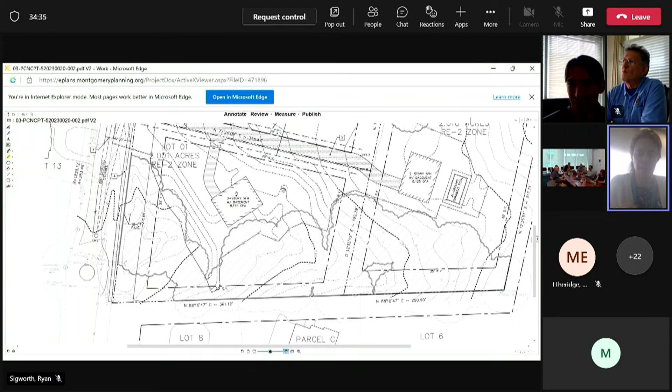Okay, yeah, I think we'll have to look at this more in the preliminary plan. Gotcha. Yeah, I just did post-development. I didn't do a pre-development comparison, actually. I was just looking at that.

Okay, yeah, well, I was trying to get a budget number for Michael, something to work on, because I looked at the system on the GIS system. It's 24 inches basically for another 850 feet, and then it converts to a 27-inch right before an outfall. So I had kind of said, well, in worst case, I would plan on at least upsizing that 850 feet. So is that a reasonable, I guess, worst case assumption, or am I being overly conservative with that?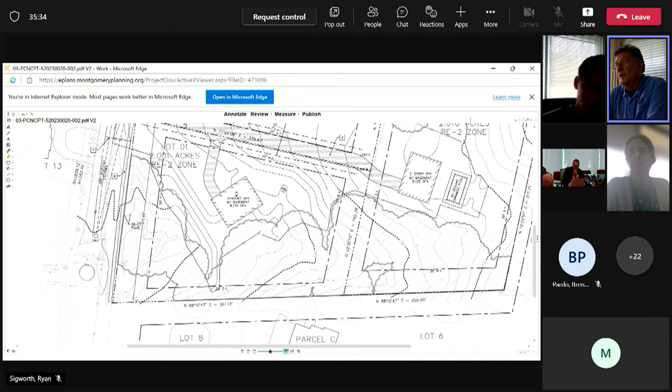We are open to the idea of on-site retention. That's not a bad idea, but you need to look at it and determine the 10-year flow. If you're mitigating it, that's fine, something we can look at. If you're not adding any water to the existing structure, you don't have to upgrade it.

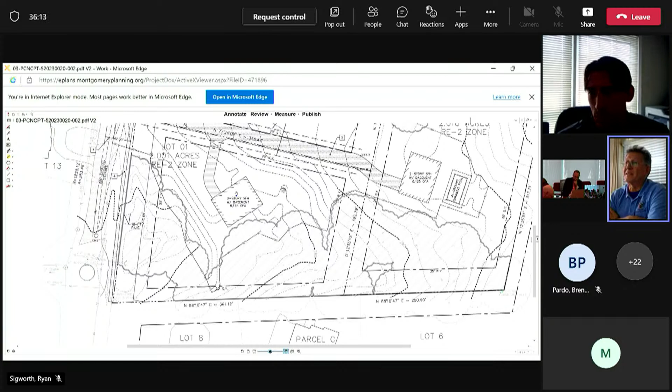Okay, so if the post-development flow is equal to or less than the pre-development, even if it is at full capacity or over capacity, we would not need to upsize it. That's right. If you're not contributing to the existing capacity, then you don't have to upgrade it.

And just following up on some of the stormwater, one of the other reviewers, I'm not sure she had an opportunity to make comments, but it was noted that on lot 1 here, you kind of have this topo, this draw that runs through here with a lot of drainage. And again, I realize even on a subdivision plan, these building footprints and locations are not set. But whether or not this location for this house is the best spot with this much happening in terms of drainage through this property, something to think about.

Yeah, that's a fair point. I think we're considering getting rid of the shared driveway in lieu of direct connections, which would mitigate the slope through there because we flattened it out for that road. But yeah, the topo there is something that we worked on.

Okay, and just one more thing, for everybody's information, stormwater management facilities would not be considered for storm drain within the public right of way. If you are mitigating on site, that's a different issue. We'll consider that.

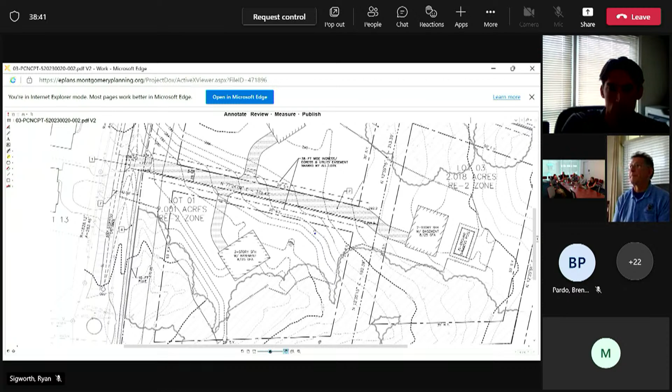Gotcha, okay. And just to follow up on something you said, Patrick. So if you're going to go with direct driveway connections for each lot, then I guess reorienting the shared driveway out to New London is a moot point.

I would say that you should try to take lots 3 and 2 out to New London, but obviously you have a corner lot there. So if you decide to stick with a shared driveway and reorient it out to New London, you may look at wanting to reorient and redraw some of these lots, which would be fine. Obviously, you'll have to cut it up so the math all works.

Yeah, no, absolutely. I think lot 3 likely will be reoriented to New London Drive, not confirmed yet though. But on that note, do I have time for another question about the fire access, or am I out of time? So you can, but Marie LaBaw, who handles those, is not here, but you can ask it very quickly. We are over time already, but if you want to ask it, go right ahead. Okay, as it's proposed, the last shared access point is 200 feet from Brickyard Road.

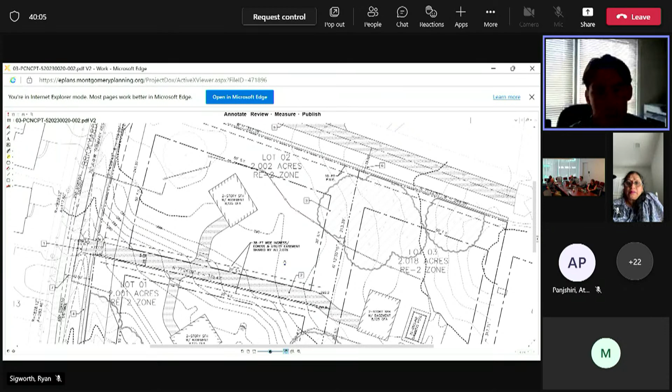We're already meeting the width requirements that she required for fire access. So my only question is, do we need to provide a turnaround in the form of a Y turnaround or a cul-de-sac with that 200-foot distance to the last shared point? So that's her - I hate to speak for Marie, and I'll let her be the final arbiter, but I think her standard is 150 feet.

So you're saying this point right here is 200 feet from Brickyard? Correct. I think, again, I don't want to speak for her, but I think you would have to get that below 150 for her to not require a turnaround. Okay, which I guess we could do then.

Perfect, okay. It could be a cul-de-sac or it could be a T, a wing T. And Patrick, I think the standards are also different if you have a shared driveway for 2 units versus 3 units. No, it's 150 all the time. But again, if you're going to go with private drives for each individual lot, then that whole 150-foot turnaround thing doesn't apply. It only applies to shared driveways.

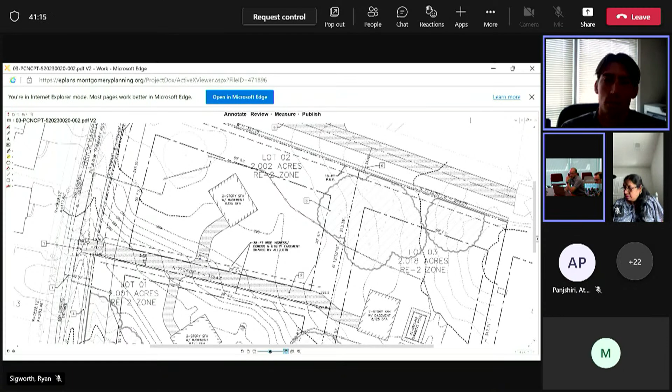Got it, okay, all right. Well, perfect. Thank you everyone for all the insight and time and everything. Sorry for going over, but no problem. I'll get back to you on the right of way question just to nail that down in the next few days. Is it possible to do it before the 15th? Because I think he has to close by then.

Yes, I can do it. I will do it before the 15th. Okay, thank you. All right, thank you everybody.

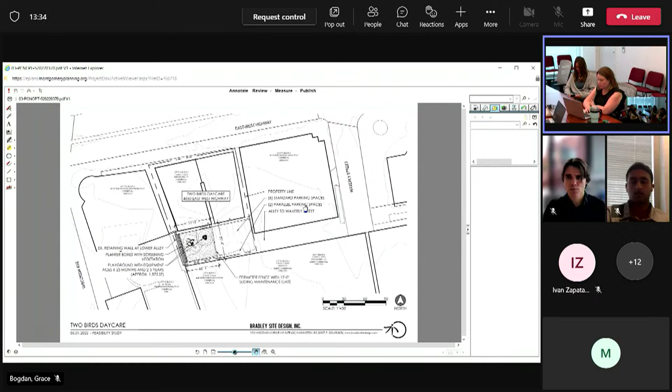Thank you. So with concept plans, what we typically do is you've received the DRC comments, and then after the meeting today, I will be sending out a memo summarizing those comments again with next steps, how you can move forward if you choose to do so. And so in this case, I will start with some of the agency comments. I think in general, there are a lot more questions that we need to have answered to give you criteria as to what would be necessary as we move forward.

So starting with fire, the division has questions in terms of what exactly is the change in use. Will the front door remain on East-West Highway? That gives implications of exactly what they would be looking for in terms of fire access review as this project moves forward. For stormwater management, if disturbance is over 5,000 square feet, then a stormwater review would be required. I think with what you're showing on the screen, it would not, but as the design moves forward, that's something you want to keep in mind. And similarly with environment and forest conservation, exemption may be required depending on the criteria of the application as it moves forward.

As you saw last week, Katie, my colleague, our transportation planner, asked a follow-up email for more specifics on the size of the daycare and the kids. With a response of 150 children at this daycare, this would likely require a transportation impact study, required either during the site plan amendment process, or if this moved forward a different way, at an APF at building permit.

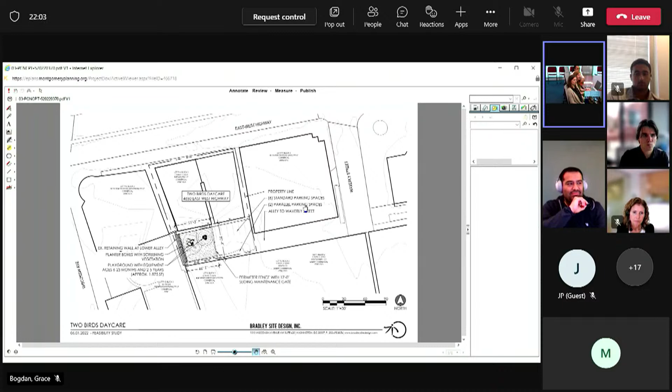Yeah, I think I would recommend providing at least one. If you're asking for my opinion, I'd suggest a van accessible space with an adjacent aisle so you're fully accessible for any need. But the code isn't super clear when it comes to PLDs — if you do provide some parking, what's the amount needed for ADA? So we'd want to touch base and work with you on that.

Hi, this is JP again from Two Birds. Thank you for clarifying some of the numbers on pickup drop off and what you've seen in the area.

That's actually really helpful. One thing we're negotiating with this landlord is that they also own some adjacent properties, including the parking garage. So we're trying to fold into these negotiations how many spots we'd have at our disposal during certain hours for our members to use during pickup and drop off. In our experience, the more the merrier, so that number of 10 is also very sound, which is quite helpful. Just to reiterate, these parking spots would be located in the garage just south of the building.

I think that would probably be a better fit for this. When we've seen other projects, like the United Therapeutics daycare or the 2 BMC daycare, they were also within a shared garage, as long as they're marked and you have that worked out with your landlord. That might be a better fit, and then these spaces could be used for either loading or trash collection or something else.

Regarding the dumpsters you mentioned, the landlord is willing to consider accommodating our needs by moving those out of the back alley area into an adjacent building that's not part of this building's premise, but could still use those dumpsters. So there's some flexibility in their logistics, given that they own so much of these surrounding properties we're considering. That's really interesting, okay.